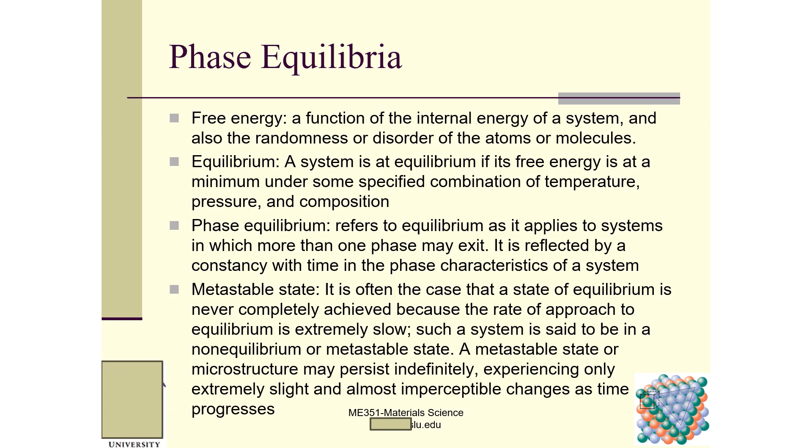So read this statement: a metastable state or microstructure may persist indefinitely. Indefinitely is a very, very important word. Experiencing only extremely slight and almost imperceptible changes as time progresses.

We then talk about phase diagrams. Phase diagrams indicate phases as a function of temperature T, composition C, and pressure P. For this material science course we have several different systems, including binary systems. Binary system, as the name suggests, means we only have two components, so independent variables focus on temperature and composition. Regarding pressure, we just assume atmospheric pressure is almost always used. So for this case, we only focus on two components and two important variables: temperature and composition.

So this is a phase diagram of the copper and nickel system. The abscissa is weight percent, and the ordinate is temperature. We can see liquid and the liquidus curve, where liquid transforms into solid, a combination of solid and liquid. Solidus means we only have solid material. So we have two phases: one is liquid phase, one is the solid phase.

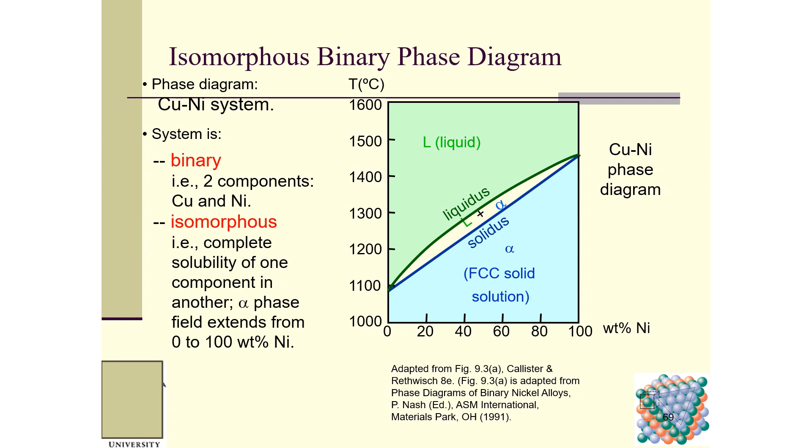Second, isomorphous, as I said, iso means something is the same. So here we have complete solubility of one component in another, from copper to nickel. The alpha phase field extends from 0% to 100% nickel. So this is called isomorphous.

In order to have an isomorphous binary phase diagram, there are some criteria that need to be met for solid solubility. Take a simple system, for example nickel and copper: both have FCC crystal structure, electronegativity 1.9 and 1.8, very similar, and their atomic radii are also very close. So both have the same crystal structure and similar electronegativities and atomic radii. This is called the Hume-Rothery rules, suggesting high mutual solubility. So nickel and copper are totally soluble in one another for all proportions.

Now for the phase diagram: determination of the phases present. Rule 1: if we know temperature and composition, we know which phases are present. If we know this point's temperature and composition, we can look at whether it's liquid, solid, or a combination. For example, at point A, this temperature and 60 weight percent nickel, we know this is alpha. At point B, 1250 degrees C, 35 weight percent, we know this is liquid plus solid.

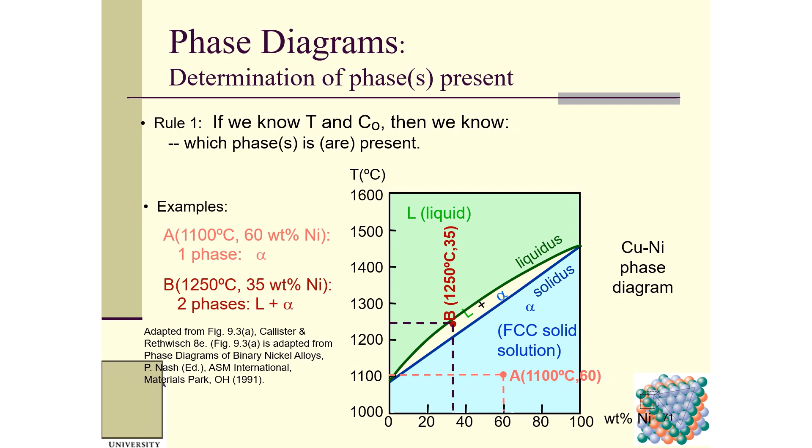Rule 2: if we know temperature and composition, we can determine the composition of each phase. Consider C0 at temperature A: only liquid is present based on rule 1, so CL equals C0 equals 35 weight percent. At temperature D, same composition, only solid alpha is present, so C alpha equals C0, still 35 weight percent.

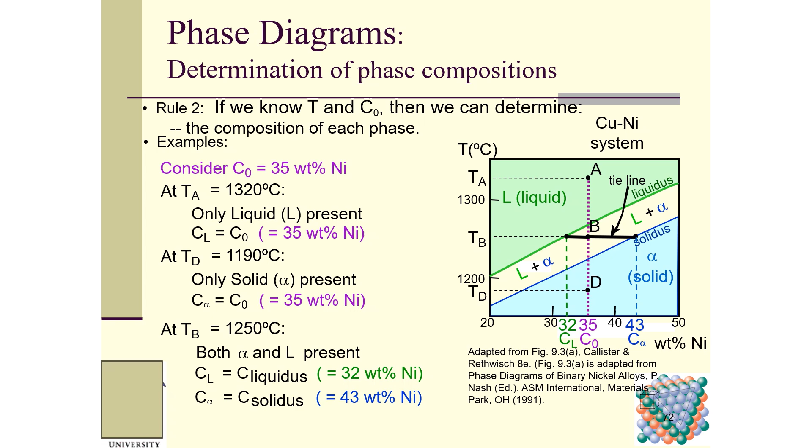At point B, located in the combination region of solid and liquid, both alpha and L are present. We draw a horizontal line, a tie line, which intersects the liquidus curve and the solidus curve at two points respectively. Drawing vertically down from these intersection points, we find CL equals this point, and C alpha equals this point. So you can get the composition of these two phases based on rule 2.

Rule 3: if we know T and C0, we can determine the weight fraction of each phase. That is amazing. Using the same example, we draw the horizontal line here giving CL and C alpha. At TA, liquid is 100%, alpha is 0%. At D, solid is 100%, liquid is 0%. At point B, drawing a horizontal line, both alpha and L are present, and WL, the liquid weight fraction, and the solid fraction share the same denominator, but you must pay attention to the numerator: for liquid we use one arm, and for solid we use the other arm. You need to be very careful here, otherwise your answer will be wrong.

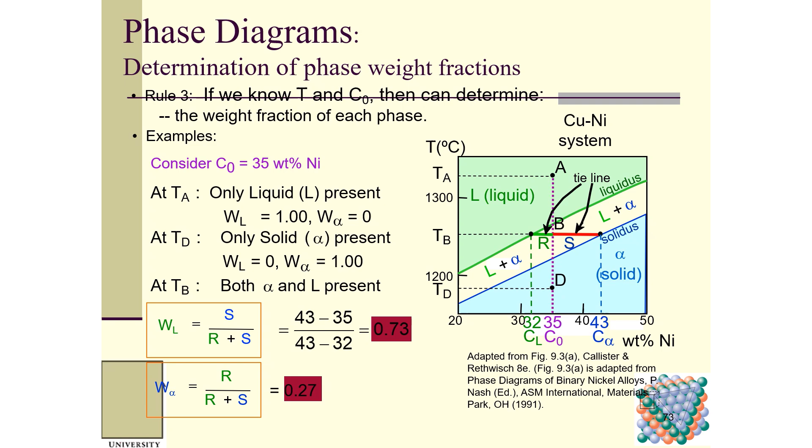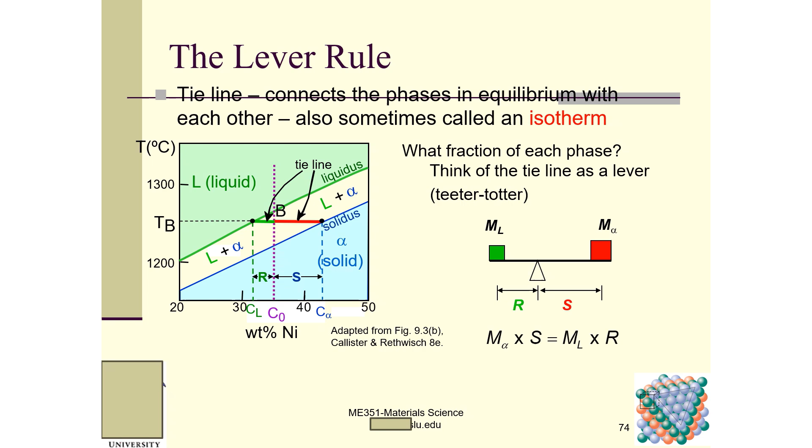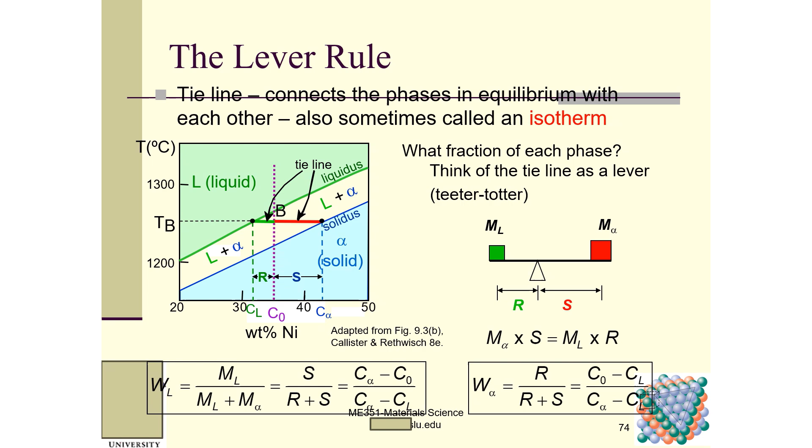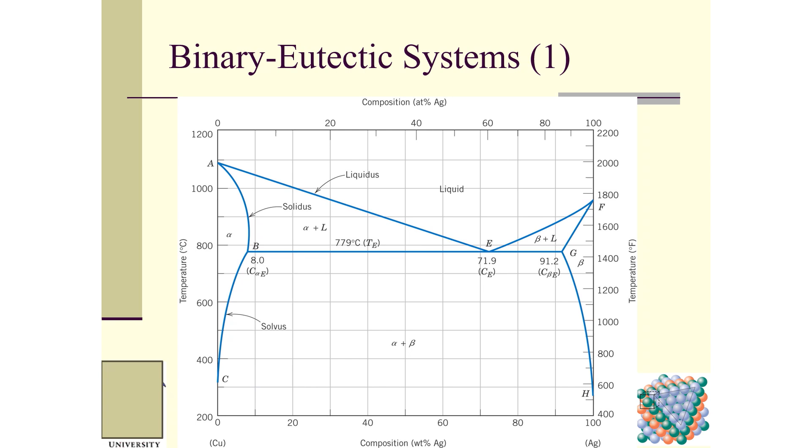Now we talk about the binary eutectic system. This diagram shows silver and copper: temperature on one axis and composition of copper and silver on the other. This is still a binary system with 2 components. In a binary eutectic system like copper and silver, the two components have a special composition with a minimum melting temperature, called the eutectic point.

There are 3 single phases: alpha, L, and beta, with limited solubility. Alpha is mostly copper, beta is mostly silver, and Te is the eutectic temperature. This is a eutectic system, and there is no liquid below Te — you can see no liquid below Te.

So CE composition at the temperature Te. At this point, you can see if we have the phase transformation from liquid to solid, we can have 1 liquid phase, then we have 2 solid phases, alpha plus beta. So be very, very careful. This is called a eutectic system. This is eutectic phase transformation. So then we talk about the example, the Pb-Sn eutectic system.

Can somebody tell me for this diagram, where is the eutectic temperature and where is the eutectic composition? Why? So here, this point is the answer: alpha plus beta, the phase composition. So here, this is the answer, and we can still use the lever rule to calculate the weight fraction of two different phases.

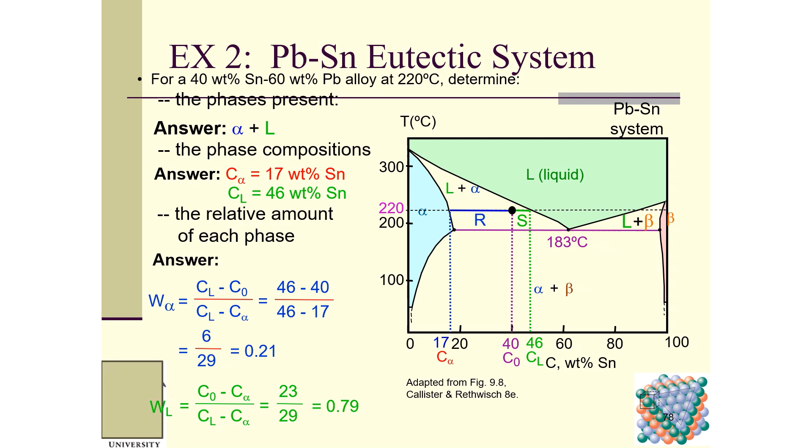SR, be careful, SR. So microstructure development in the eutectic system.

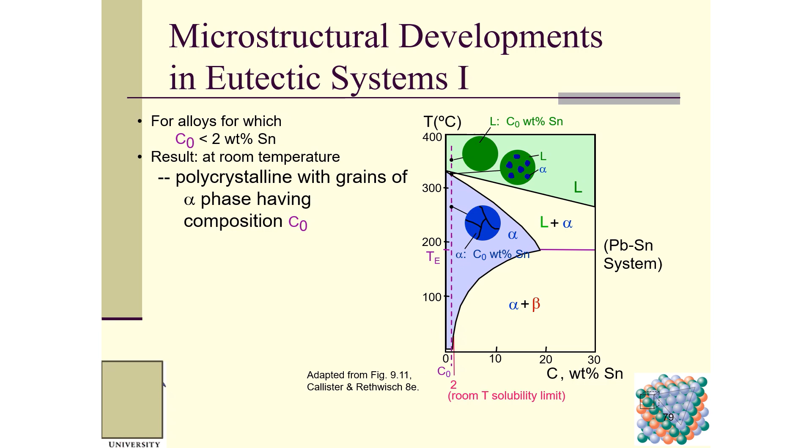So for alloys for which the composition is less than 2% Sn, the result at room temperature: polycrystalline with grains of alpha phase having composition of C0. So polycrystalline with alpha grains. You can see this, we have alpha here. This is solid. So this one is polycrystalline, this the grains, polygrains.

For another range, from 2% to 18.3%, we go here: 1, 2, 3, 4. We have 4 fields. We will experience, we will go through 4 fields. At room temperature, alpha plus beta range, alpha plus beta range, alpha plus beta range.

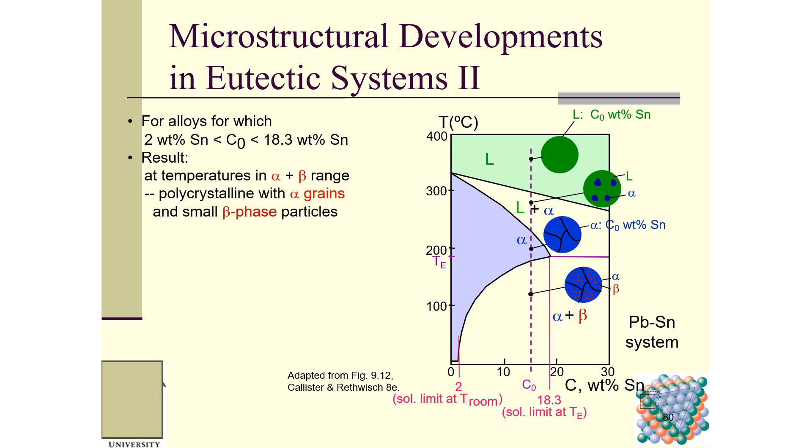Polycrystalline, this liquid, alpha plus L plus alpha. So this is the alpha - you can see this alpha solid. So this is alpha. Within this alpha, we have these beta particles.

For another range, this part shows eutectic microstructure, lamellar structure. So lamellar structure - you can see lamellar. What is lamellar? Alternating layers, lamellae, of alpha and beta phases. You can see this one, you can see the lamella. Lamella means alternating layers of two different phases. Very, very beautiful.

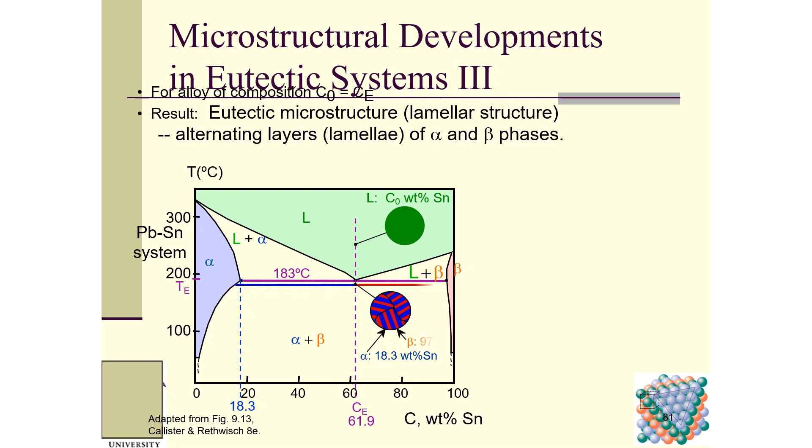This eutectic for another range: this is L plus alpha, so it is still alpha, L plus alpha, can still use the lever rule. And here is a primary alpha, eutectic alpha, and this is eutectic beta. Eutectic alpha and eutectic beta, and they form the lamella. And the primary alpha is the alpha we got here, and it was just like balls here. It's very, very beautiful.

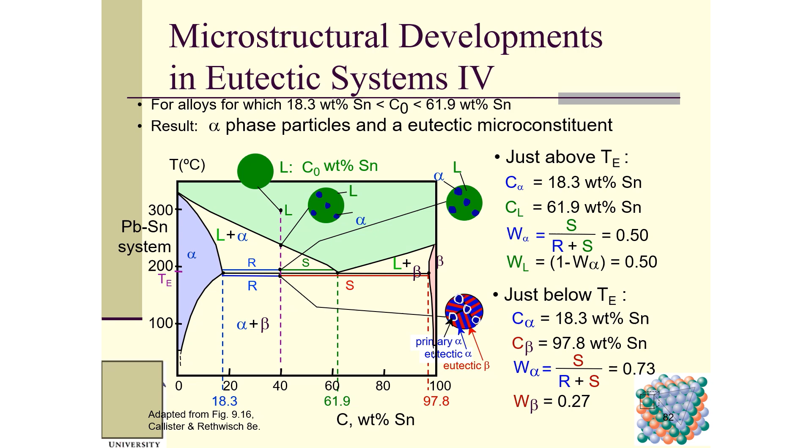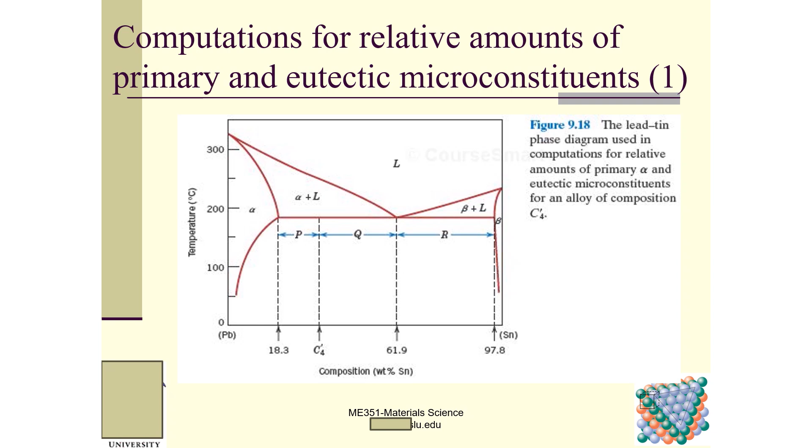So we have eutectic, eutectoid, and peritectic phase transformations. Eutectic: liquid becomes two different solid phases. Eutectoid: one solid phase transforms to two other solid phases. Peritectic, as the name suggests, peri, is kind of half liquid and one solid phase transforming to a second solid phase. Be very, very careful about this.

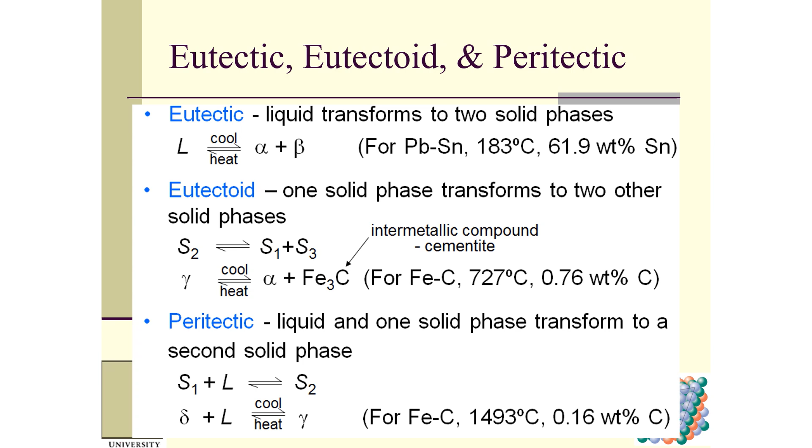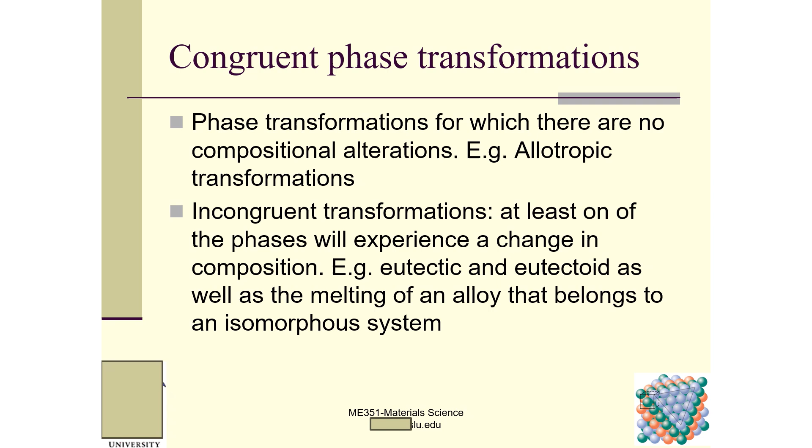So congruent phase transformation: a phase transformation for which there are no composition alterations, for example allotropic transformation, from alpha to beta - these alpha and beta are from the same material. Incongruent transformation: at least one of the phases will experience a change in composition. For example, eutectic and eutectoid, as well as the melting of an alloy that belongs to an isomorphous system. So this is a congruent phase transformation.

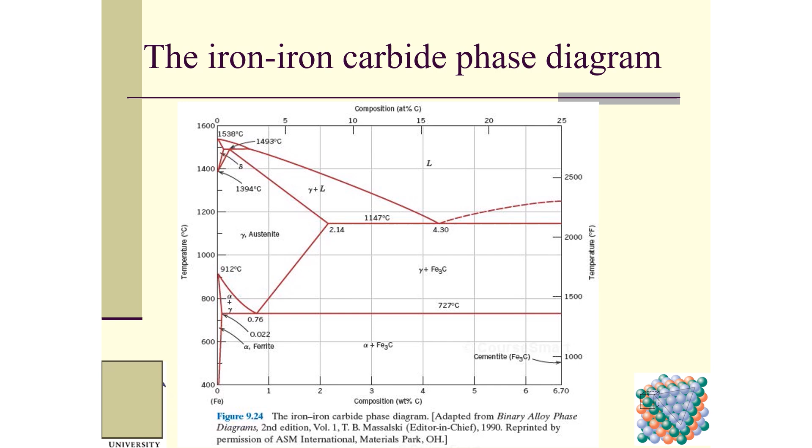And then we talk about the iron carbide phase transformation. As I told you guys when we learned this topic, this is the most important - iron carbide is still the most important phase diagram. So here, this is very, very important. First, iron carbon, we call it the iron carbon or iron carbide phase diagram.

Two important points: eutectic A, eutectic, from liquid to two solids. And eutectoid B, here, from gamma to two - from the gamma solid to two different other solids. This is eutectoid. Very, very beautiful.

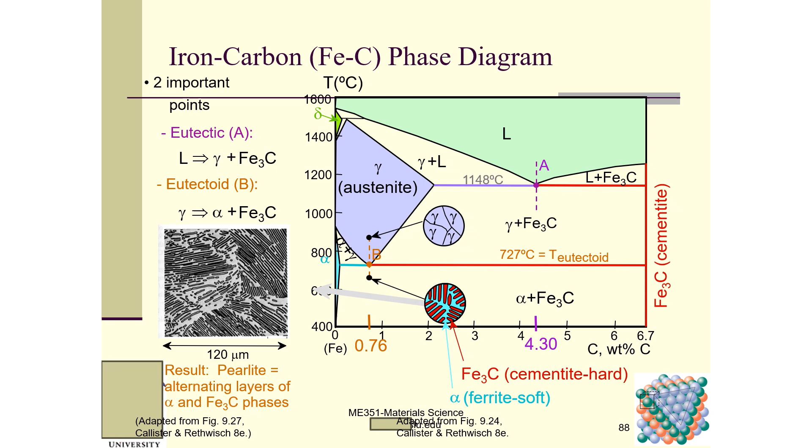This is a lamella, cementite, hard, cementite, Fe3C. So this is a micrograph. Cementite forms when the solubility limit of carbon in alpha ferrite is exceeded below 727 degrees C. The cementite also coexists with the gamma phase between 727 and 1147 degrees C. Mechanically, cementite is very hard and brittle. The strength of some steels is greatly enhanced by its presence.

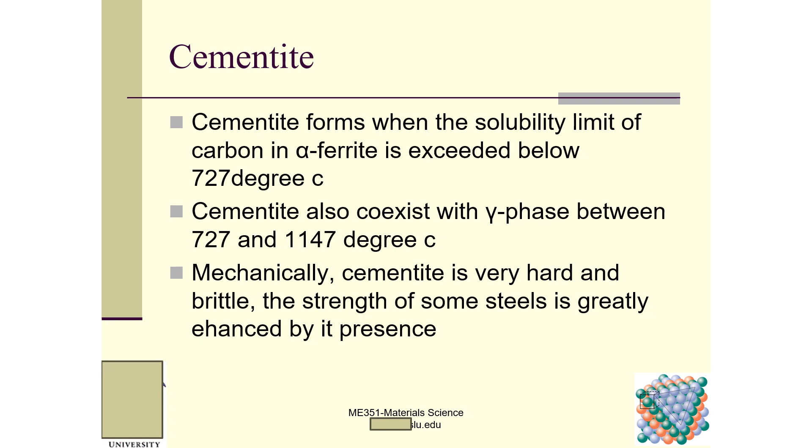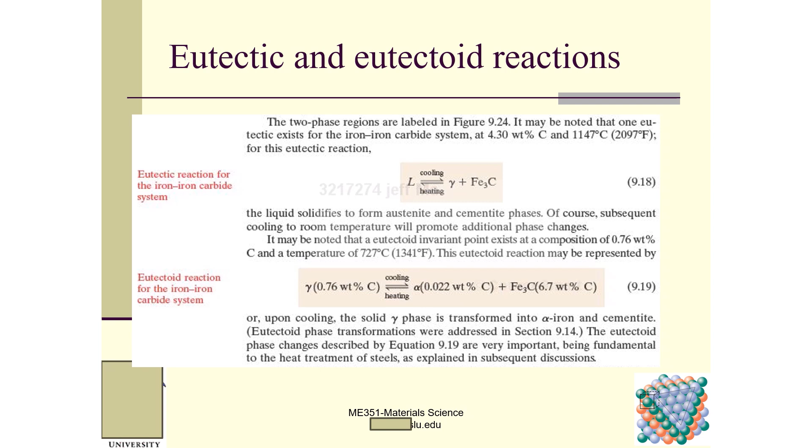So this eutectic and eutectoid reaction. Eutectic and eutectoid, we talked about this one, and I want you guys to look at this one by yourself. Development of microstructure, so here, okay, you can see...

This is the dots there, so alpha dots grow. And then we have pearlite. This is pearlite, meaning the lamella structure. This is the dark area, this is alpha. This is pro-eutectoid ferrite.

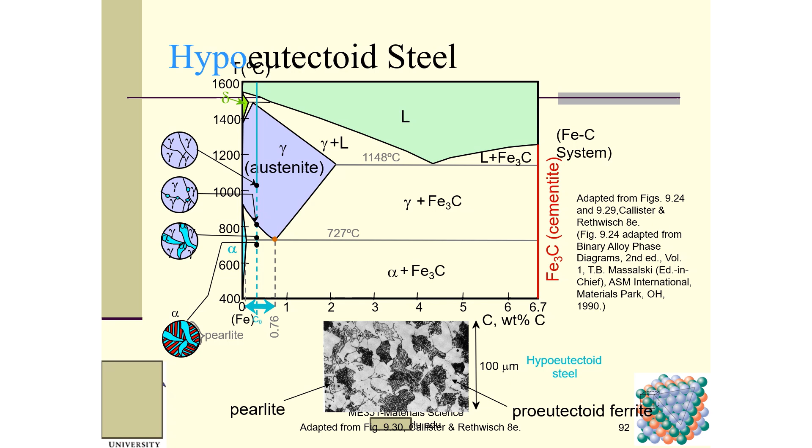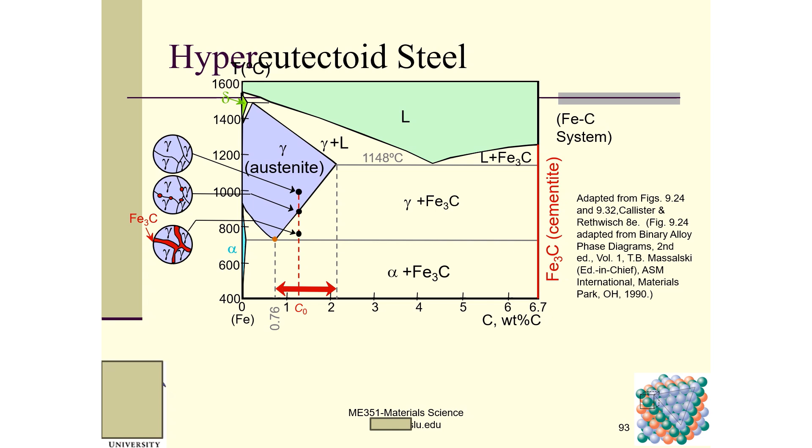Hyper-eutectoid means the composition of carbon is higher than the eutectoid composition, which is this value. You can see this gamma, and then we have cementite, Fe3C. Going down, we also have pearlite, this lamella of pearlite, so this is a micrograph.

So then we can use the lever rule to calculate the relative weight fraction. We still use this value, this equation. I want you guys to take a closer look at these equations.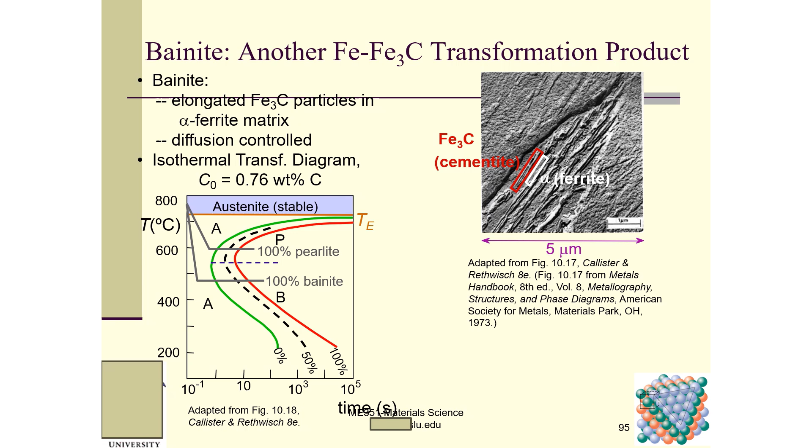So here, we go down and hold the temperature. Here is 100% pearlite, this is the fine pearlite. If we go down, we have the bainite. This is bainite. And then we have another one, spheroidite.

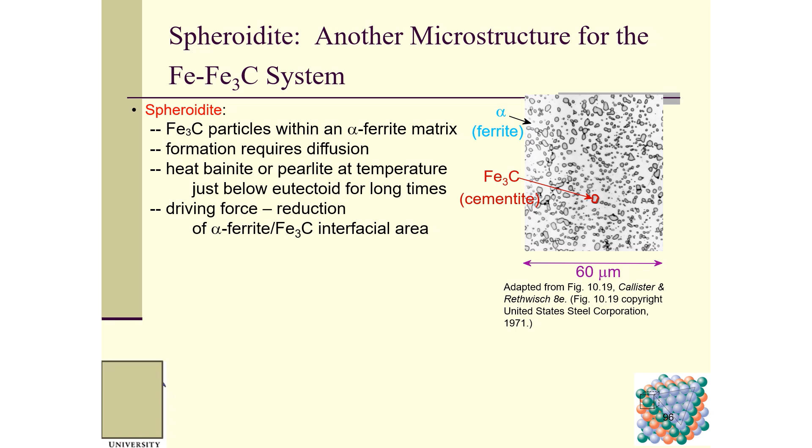Formation requires diffusion, diffusion of either carbon or iron. Heat bainite or pearlite at a temperature just below eutectoid for a long time. The driving force is reduction of the alpha ferrite and cementite interfacial area. Why? Because the reduction of this interfacial area can reach a minimum level of energy for the system. As I've told you many times, all systems tend to reach the minimum level of energy in order to be stable.

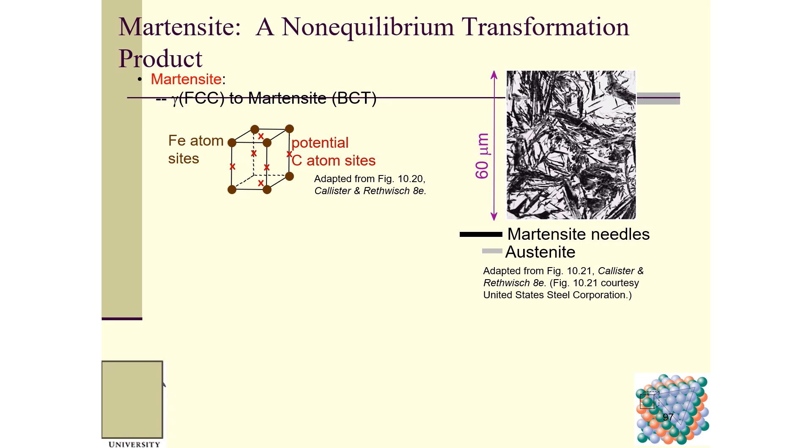Then we'll talk about martensite. Martensite is very, very important, a non-equilibrium transformation product. You can see it looks like needles. Martensite goes from FCC to martensite BCT. So this is a BCT, the crystal structure changes. So in the isothermal transformation diagram, when can we get this martensite?

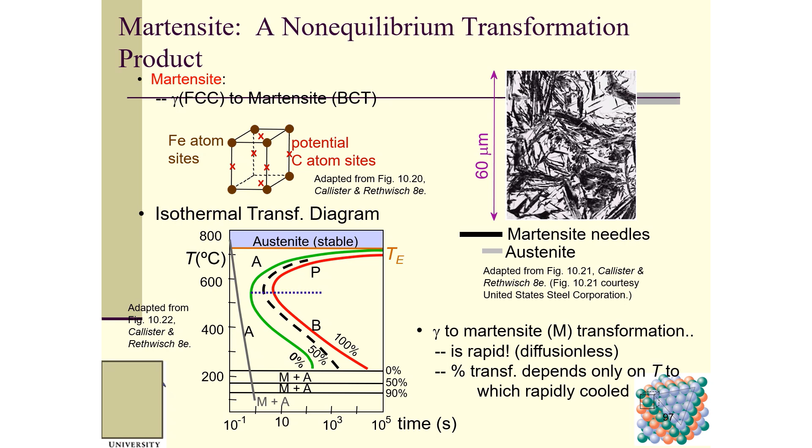When the system has a very, very high cooling rate, and this cooling rate does not intersect with these two curves, then we can get this martensite. Martensite forms very rapidly, diffusionless, because the time is very short. And the percentage of transformation depends on the temperature to which it's rapidly cooled, the final temperature you want to achieve.

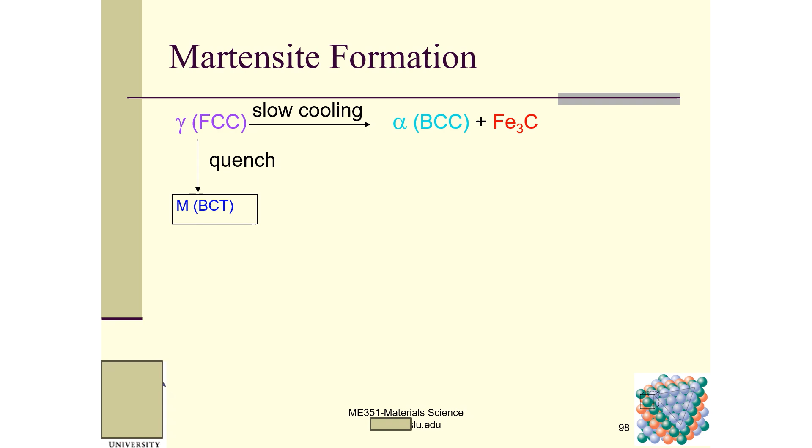So martensite formation: FCC with slow cooling gives us alpha and cementite. However, with quenching, we can get martensite, BCT, another crystal structure. Martensite is a single phase and has a body-centered tetragonal, BCT, crystal structure. Tetragonal, diffusionless because of the short time.

As a result, BCT has few slip planes, and it's hard and brittle. This martensitic material usually cannot be used because it's too hard. So then we need to temper it in order to get a better tempered martensite, which is more ductile than the original martensite, but still very, very hard.

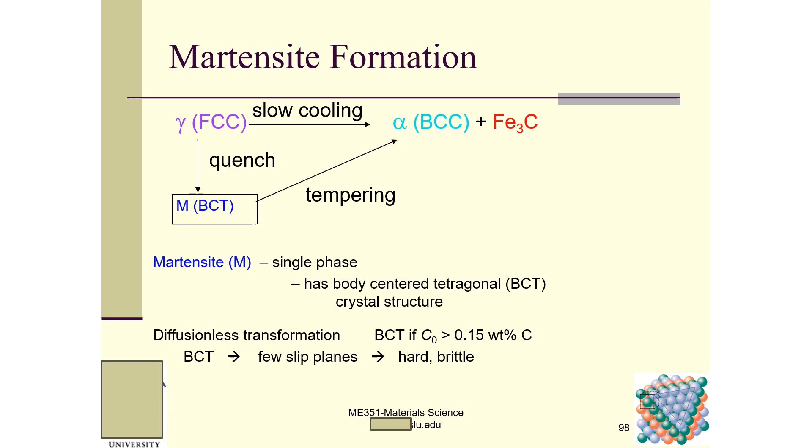So this tempered martensite: BCT to tempered martensite, alpha plus cementite phases.

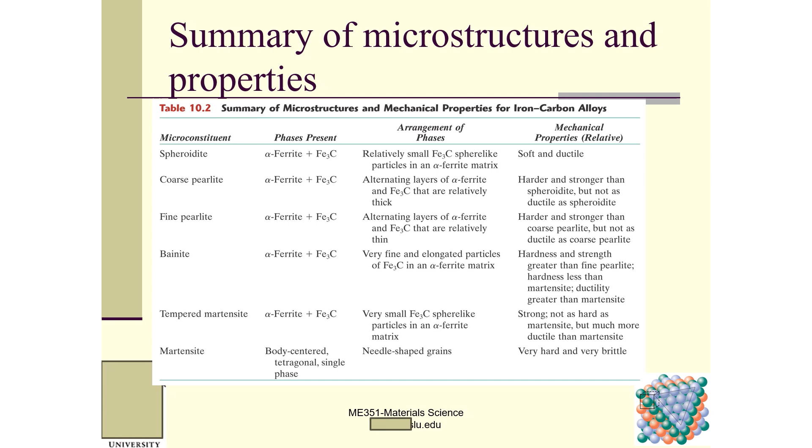So this is a summary of microstructures and properties for these iron carbide diagrams. Be very, very careful, as I said, this diagram is the most important diagram I want to emphasize for my students.